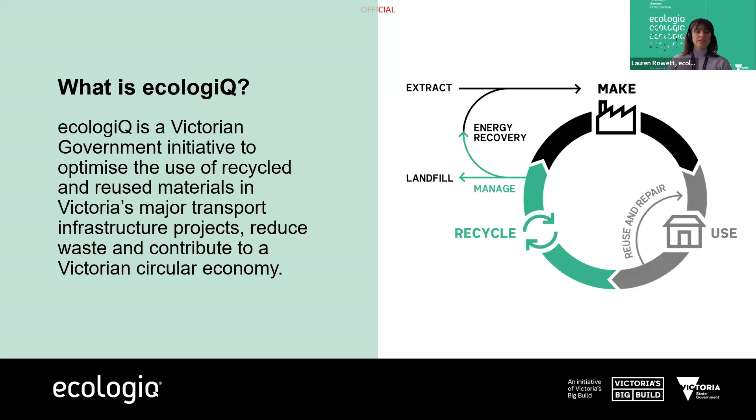The way we do this is through the Recycled First policy. Implemented in March of 2020, the policy requires that all tenderers of Victorian big build projects must consider and demonstrate how they will incorporate recycled and reused materials into that project, and also report on their use before, during and at completion of construction.

This data component is super important. It not only shows us how much recycled material we've been using, but also helps to give us insights into the market and know where our efforts are best placed. Speaking of data, as at the end of July, the policy has seen 4.6 million tonnes of recycled material used in big build projects, which is fantastic, really big numbers there, and 4 million tonnes committed. For those of us online who like to count in MCGs, that's 1.75 MCGs of recycled material.

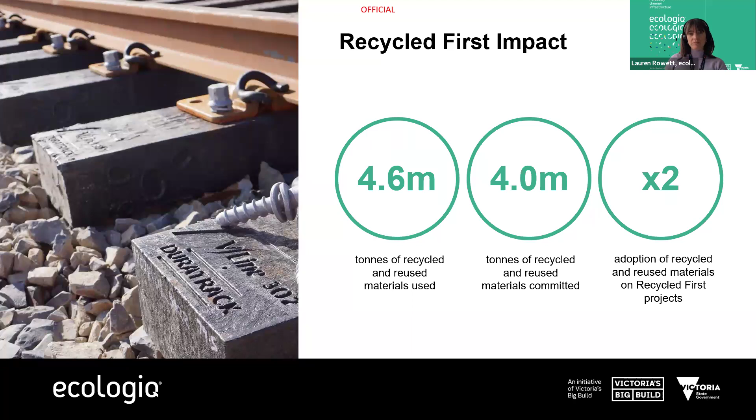Good morning, Lauren. Good morning, everyone. Andrew Papkostas, Principal Engineer, Pavements and Materials within the Department of Transport and Planning. One of my core areas of responsibility relates to the development of specifications and technical standards, and that involves liaising with industry in regards to proposals to introduce new materials into road construction, particularly in my case, the pavement space.

Thanks, Lauren. Thanks, Andrew. Irina? Hi, everyone. My name is Irina Kosteska. My role is Deputy Director Engineering at MRPV. So me and the engineering team are very much involved in supporting ecologiQ and ensuring that the Recycled First policy is implemented on projects. We also work on removing any barriers, which is a result of insufficient or outdated standards, and work very closely with DTP to develop specifications and new standards and approved materials, which support Recycled First.

Beautiful. Thank you, Irina, and lovely to have both you and Andrew back. We have a new panelist joining us today as well, Stephen Howe. Good morning, and thank you for that. Yes, I'm the Director of Engineering Solutions and Innovation at the Level Crossing Removal Project. My role is to work with our alliance partners across the whole program on things like optimising standardised solutions for various design elements of scope, but also in the innovation space, bringing about the use of innovative materials and also sustainable materials, which is why I'm heavily involved in the statewide low carbon concrete working group, which looks at sustainable concrete, but also other sustainable materials and innovative materials to bring into the big build.

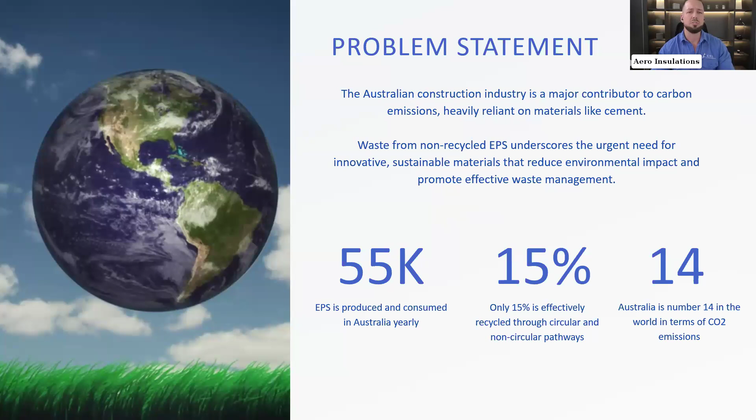These challenges highlight the urgent need for sustainable construction material that reduces environmental impact and makes use of recycled waste. This need is driven by growing regulations and the rising demand for green building practices. Despite all of these pressures, the market often lacks cost-effective, high-performance solutions that align with environmental goals. This gap offers a unique opportunity for innovative products such as Aerofill that can redefine construction standards.

Aerofill complies with the NCC, BCA, and building standards, ensuring it meets the rigorous demands of modern construction projects. Aerofill offers a groundbreaking solution by turning EPS waste into a valuable resource by combining recycled EPS with cement and a bio-based polymer-modified binder. Aerofill not only cuts down on cement use, but also converts EPS waste into an efficient void filler and insulating screed. This process reduces landfill waste and lessens the need for virgin material. The use of a bio-based binder further minimizes the carbon footprint, making Aerofill a standout product in sustainable construction.

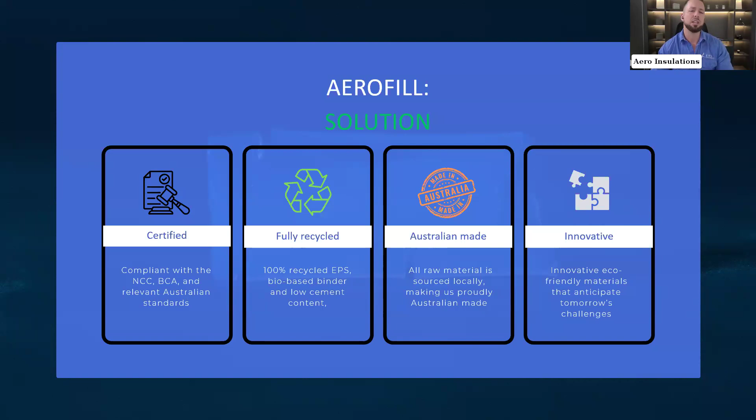Aerofill's unique composition delivers superior insulation and acoustic properties while maintaining structural integrity and reducing the carbon footprint of construction projects. This innovative approach aligns with global sustainability goals and offers a practical, eco-friendly alternative to conventional material.

Aerofill's lightweight nature greatly reduces the structural load on buildings, making it ideal for projects where weight is a critical factor. It offers exceptional thermal as well as acoustic insulation capabilities, ensuring that buildings stay warmer in winter and cooler in summer, leading to substantial energy savings over time.

By integrating recycled EPS and the bio-based binder, Aerofill significantly cuts down on CO2 emissions associated with the production and disposal of building material. The use of Aerofill can lead to lower overall construction costs due to its ease of application and reduced need for additional material. Aerofill not only utilizes waste EPS, which would otherwise end up in landfill, it also encourages the recycling loop within the construction industry, supporting global sustainability initiatives. Aerofill's composition ensures it's durable and requires minimal maintenance over its lifespan, reducing long-term costs for asset owners.

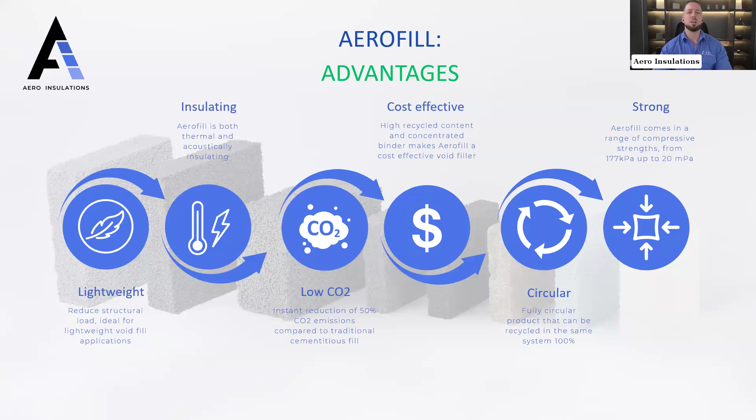Aerofill's versatility is one of its standout features, making it ideal for a wide range of applications across residential, commercial, mining, civil, and specialized sectors. In residential settings, Aerofill excels in slab insulation due to its low thermal conductivity. It's also the preferred choice for renovations and extensions, where cost-effective and energy-efficient properties can enhance the thermal performance of floors, thereby reducing heat loss and energy bills.

In the commercial sector, Aerofill creates inviting and comfortable environments in retail spaces by providing a solid foundation for various floor finishes, while also offering exceptional thermal and acoustic insulation.

Other applications are warehouses, distribution centers, and cold storage facilities, where maintaining consistent temperatures is crucial for storage and logistics. It can be retrofitted onto existing slabs to provide better thermal performance, and is also used in manufacturing facilities to support efficient production processes by providing excellent load-bearing capacity and thermal insulation.

Moreover, Aerofill is an excellent solution for environments requiring significant sound reduction, such as schools and hospitals, helping create quieter, more conducive spaces for learning and healing.

In mining, Aerofill offers a significant advantage over traditional cellular cement fill, with a reduction of 50% in cement and CO2 emissions to reach the same compressive strength results, while maintaining structural integrity, by default offering a lightweight alternative.

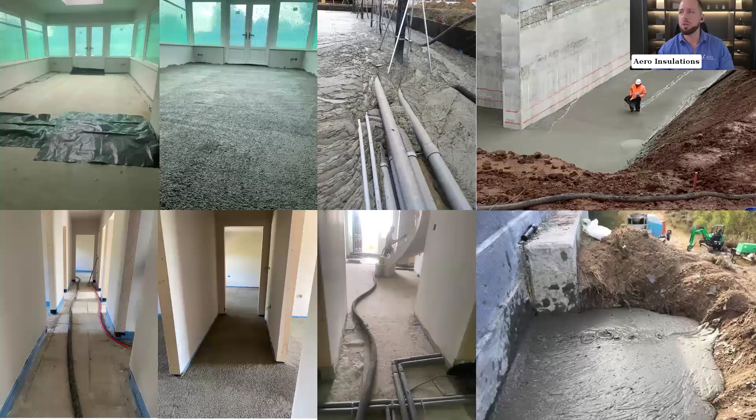On the next slide, we have a few photos showing before and afters of Aerofill being installed as an insulating screed, and a few photos of cellular cement and cellular concrete installations where Aerofill could be an immediate replacement, offering a 50% reduction in cement and using fully 100% recycled aggregate.

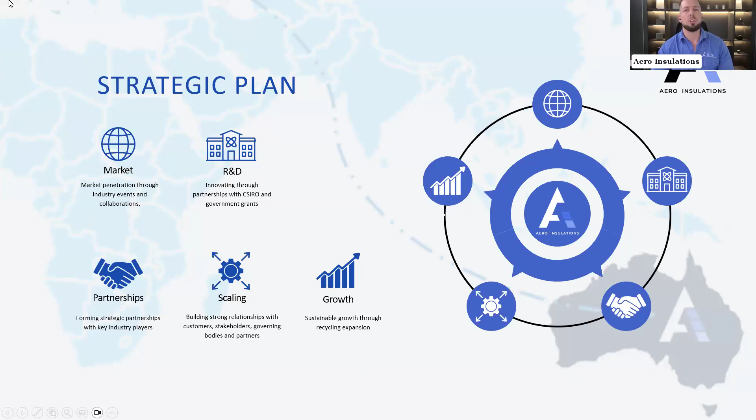So as we've discussed today very briefly, Aerofill is more than just an innovative product. It's a vital step towards a more sustainable future for the Australian construction industry.

By choosing Aerofill, you're not only investing in a high-performance, eco-friendly material, you're also aligning with the growing demand for sustainable practices that meet and exceed industry standards. Aerofill sets new benchmarks in building material by utilizing fully recycled EPS, reducing CO2 emissions, and offering superior performance.

We invite you to join us on this journey towards a more sustainable and efficient construction process. Whether you're planning a residential project, commercial development, or a large-scale industrial endeavor, Aerofill can provide the solution you need. We're ready to partner with you, offering not only innovative material, but also the support and expertise needed to ensure the success of your projects. For more information, or to discuss how Aerofill can be integrated on your upcoming projects, please reach out to myself or my team. Let's collaborate and make your next project more sustainable and cost-effective. I now welcome any questions the panel might have.

Beautiful, thank you so much, Walter. Irina, I can see you switched on first, so take it away.

Thanks a lot, Walter. From what I understand from your presentation, you don't have any barriers to using this material within Australia, is that right? Not really. At the end of the day, all the components that we use in the system are all stuff that's used widely in the building industry. Like EPS is used as waffle pods widely, even geofoam is used very much. All we're doing is using components that are currently being used, combining them together and making something innovative, something we can use in a different way.

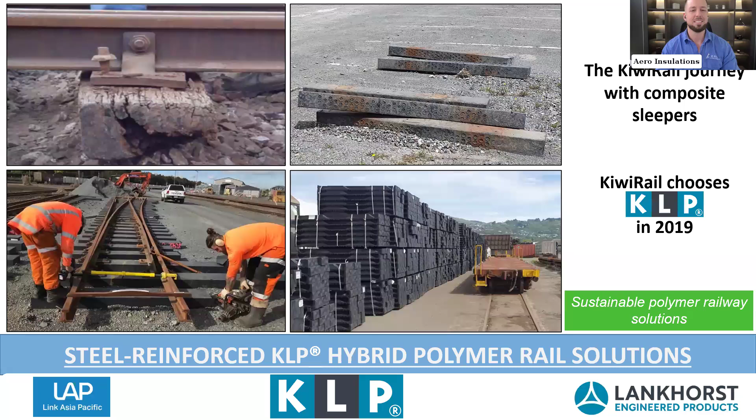Good morning, everyone. My name is Gerhard Klooster from Link Asia Pacific. We are Brisbane based. We are the agents for KLP hybrid polymer sleepers, made in the Netherlands by a company called Lankhorst Engineered Products.

Now, on the first page visible on the screen, you'll see a couple of slides. This basically tells the story, the journey that KiwiRail took. Left top, you see a rotten timber sleeper, basically with a life expectancy normally of 25 years, in this case seeing less than 8 years. So KiwiRail was looking for an alternative option.

They went for a composite product, composite sleeper. Tried that for about 3 years, were not happy with that, and basically went to open tender for other alternative composite sleepers. There were 7 tenderers, and ultimately the contract was awarded to Lankhorst Engineered Products and ourselves. And you see bottom right, a number of mainline sleepers, optimized sleepers that go into a tunnel project, giving you an idea of the scale.

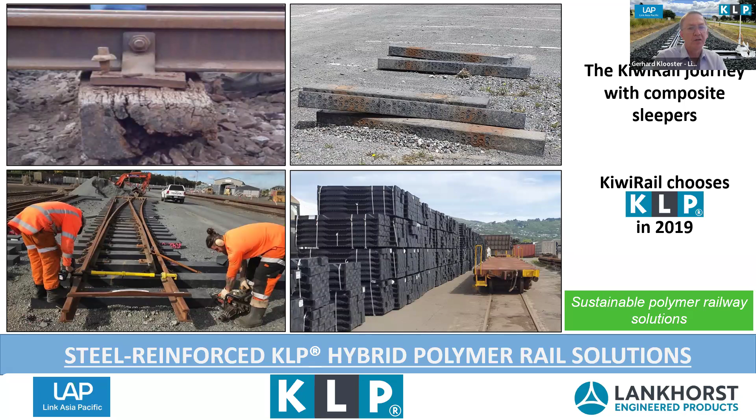Sole supply for 3 years. That was extended by 2 years, and we are now extending it for the 3rd time, showing their happiness with the product.

Left bottom, you see a turnout being assembled and installed in the KiwiRail track. Now, the question is, of course, what makes the difference between our product and others? And that has to do with design on one side, and materials on the other. Next slide, please, Lauren.

So the first product that we use is 100% recycled ductile polymer. The HS is high strength. It means that this product has the strength and stiffness at 60 degrees Celsius that the normal product used in Europe has at 25 degrees Celsius. So it's high strength for the temperatures that we experience in Australia.

The product is 100% recycled material, so it is also 100% recyclable, meaning that at the end of life, you have 2 distinct products, the stiffener and the polymer. They can be separated from one another, basically reused and made into a new sleeper again. So that's a circular economy. On an ongoing basis, every 50 years, you can recycle the product into new product.

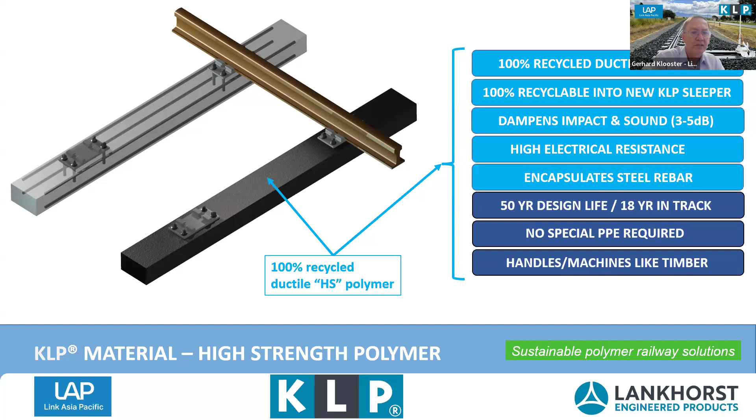Next slide, please. The other material that we have is the steel rebar that you can see across the length of the product, one in each corner, 4 of them in total. It's ribbed, so it has a good physical interaction with the polymer that it is surrounded by and does not move inside the polymer.

It basically, with the steel, gives a high stiffness, and we are aiming to have a stiffness comparable to the timber that we replace, which in essence helps you to intersperse. You can take timber sleepers out and put our product in, because the bending stiffness is very similar to that of the timber it replaces. Steel has a low thermal coefficient of expansion, slightly higher than concrete, slightly higher than timber, but a lot lower than plastic, a lot lower than fibers, and therefore the gauge stability over a wide temperature range is basically guaranteed.

And then because of the steel, if you have a derailment or some sort of extreme overload situation, you will find plastic deformation, but not a brittle fracture.

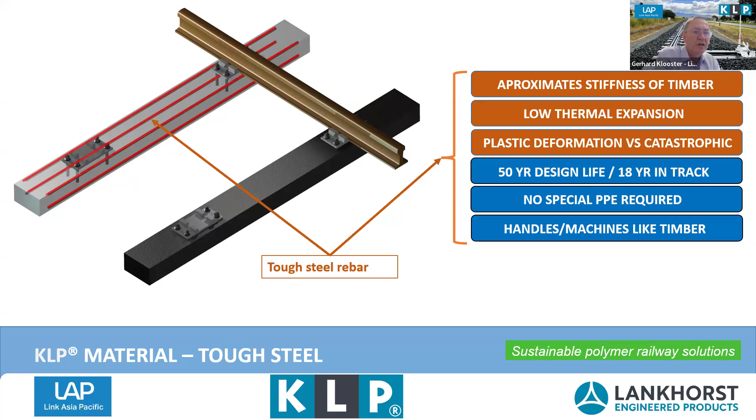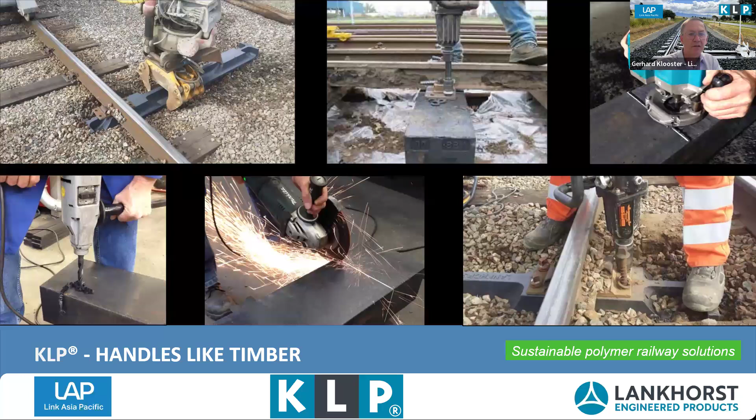We can see how the product is used like any other timber material. The equipment top left handles the same as the standard equipment being used. You can mill it, drill it, cut it, and screw fasteners in with power tools, as you would do with any timber sleeper. So there's no special training required - you can just do it.

Paperwork is always important to have as background. On the paperwork, we have provisional type approvals from MTM Metro in Victoria. We also have provisional type approval from V-Line, and a full type approval from Kiwi Rail, who's been using it since 2019.

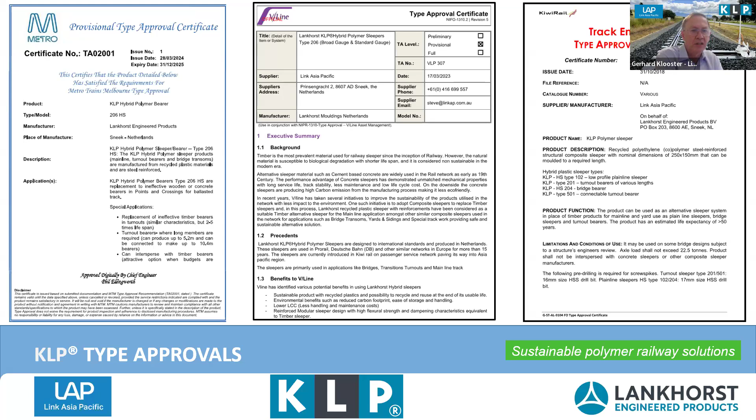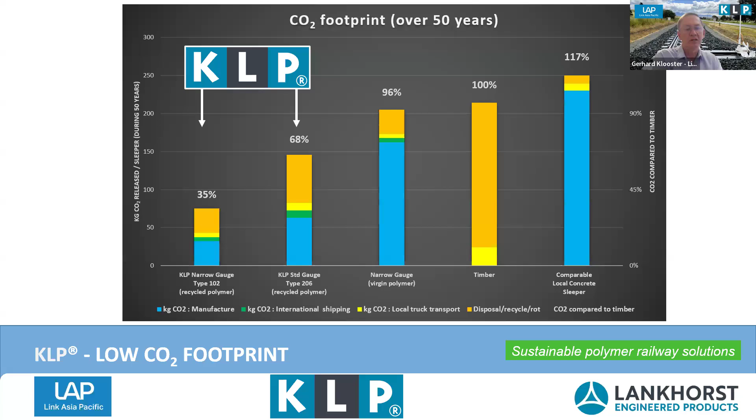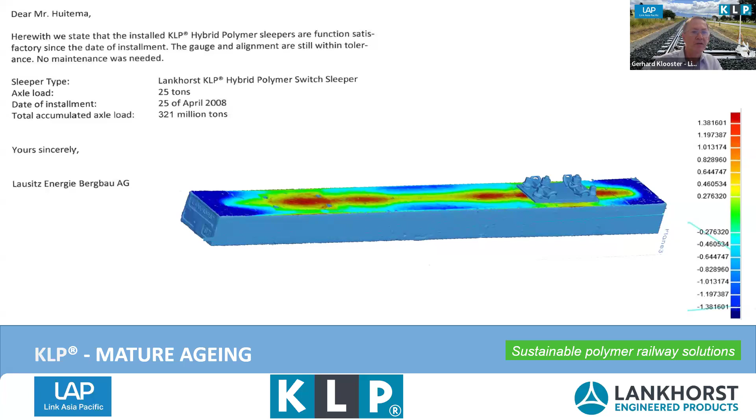This is a little case study - a sleeper that was installed in a coal mine in Germany in 2008. There's a letter with wording at the top that you may read at your own leisure. The axle load is 25 tons in this case. It was installed in 2008 and had seen 320 million tons of traffic. We did a 3D scan of the product showing that it stayed within the original specification of flatness. On the scale on the right-hand side, you can see that it is within plus minus 1.4 millimeters out of plane variation.

You see on the left-hand side the tunnel where KiwiRail was using composite sleepers. This is a special sleeper made as low as possible, 130 millimeters high.

A viaduct in the Netherlands. The benefit with the viaduct is that you can make the entire viaduct lighter because you use lighter dead weight, in that the KLP sleeper is a lot lighter than a concrete sleeper.

And the third set of sleepers is the new Hedgehog, as it's fondly called. It's a new product, it uses less material, it's still recycled, and it gives better lateral stability in track than even concrete, which is 2-3 times the weight. It is shaped in a form where you can get the best benefit out of it.

And finally, you see on the map where our products are installed. And that's the end of my presentation, open for the panel for questions.

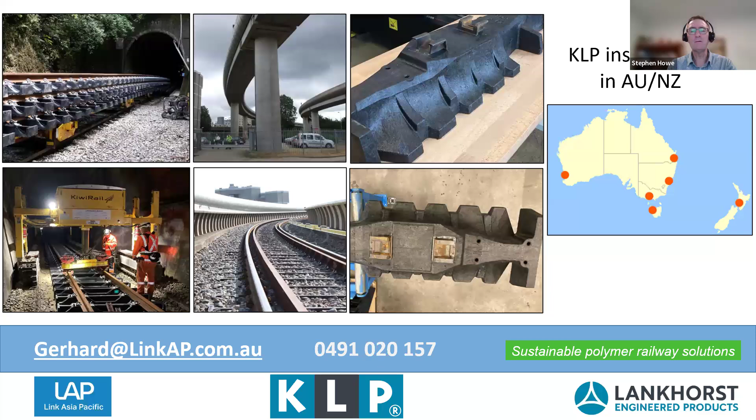I'm interested in that hedgehog one as well. I don't think you showed us that in our offline discussions. How new is that one?

Very new. This is basically undergoing first test. We've got the first sort of off-tool samples. This will be on show at Innotrans in Germany, which is a major rail show in Europe every second year, in September. So this is hot off the press.

The key thing is the benefits are fundamentally that the stability is better than concrete in lateral stability. What you do find is a sagging of ballast and a pumping of ballast, which this one will do a lot less. But it will probably still be another 2-3 years before this one really goes, is ready for production and installation.

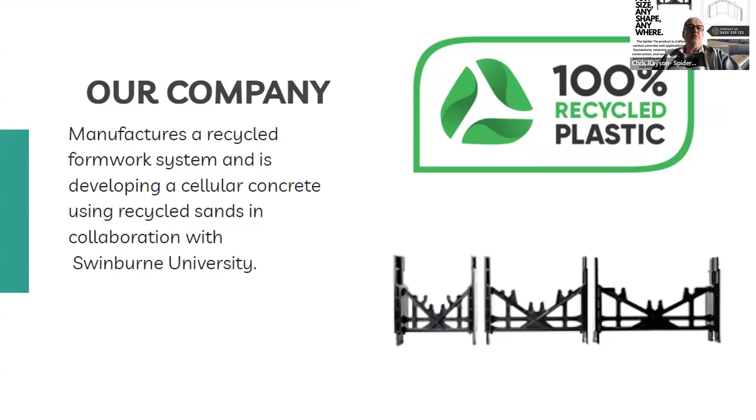Our company manufactures Spider Tie concrete formwork system. It's designed in the USA, but now manufactured in Australia from 100% recycled polypropylene. This system is used for structural and cellular concrete purposes. Got a small video to play showing the encapsulation process - if you could play that, please.

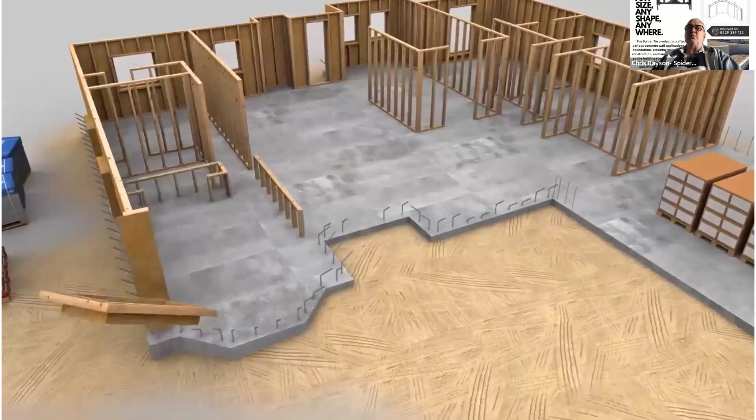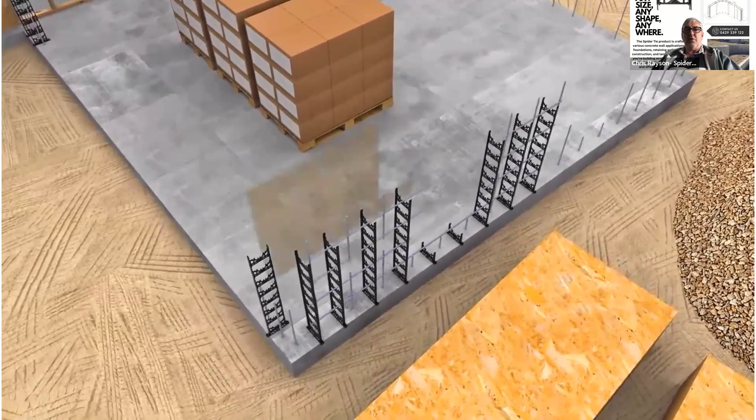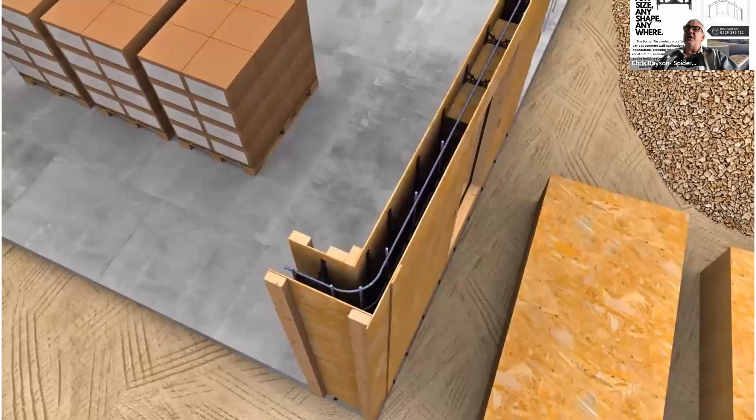So this video is fairly old from the US, just showing how houses were built in its original design using timber, which we're not doing in our construction in Australia. We're actually using light gauge steel frame and developing cellular concrete with help from Swinburne University. But the spider ties themselves, you can see in the video, clip together. They form a wall system that can be filled with either structural or cellular concrete. So the plywood is only a temporary form and can get reused on other jobs.

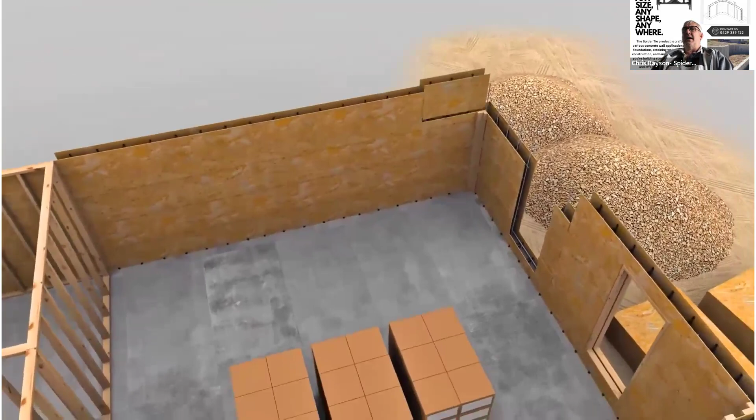Video goes for a couple of minutes, but the plywood can either, as you can see, be put in box sections and assembled, or assembled on site. So currently we're doing a job in South Australia, building a big concrete pit for the grape industry. That's in production over there.

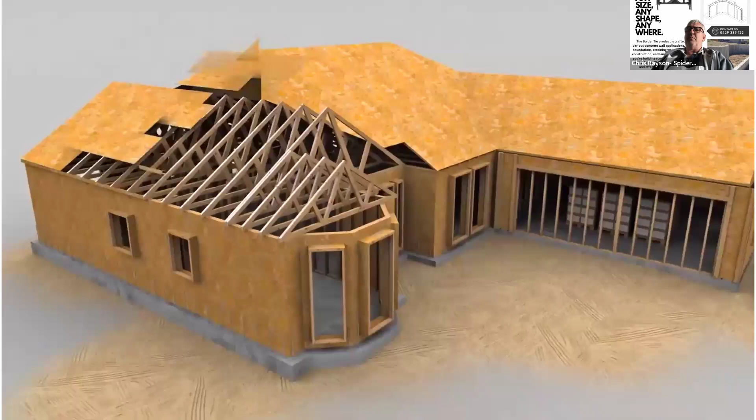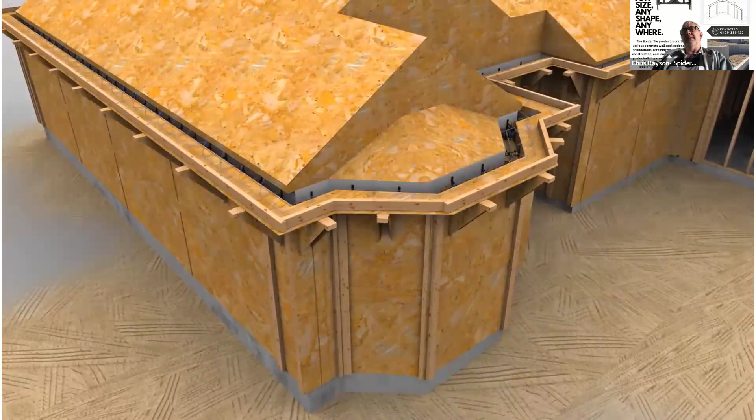But the other thing, we're working with CSIRO to develop monolithic fireproof houses. So you can see in the video here that the Spider Ties are getting attached to the house, and it's ready for - you'll see in a second - a pour that goes and creates the wall system and then continues over the roof to give you monolithic coverage, which then in a fire situation can stop ember attack from entering the building.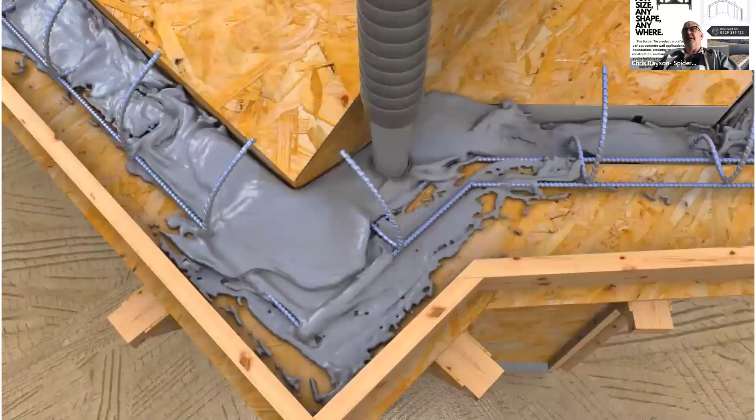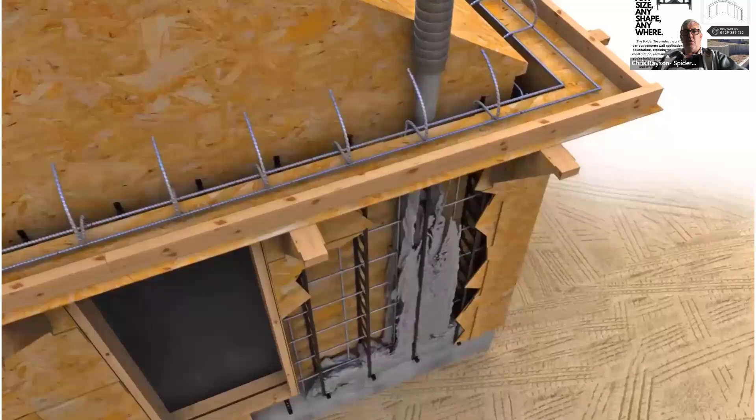With the university, as I said, we're developing cellular concrete, and we are looking at using recycled products like waste from contaminated sites, and there was another product, biochar, made from waste timbers from construction sites. These products can be added into the design mix to develop cellular concrete.

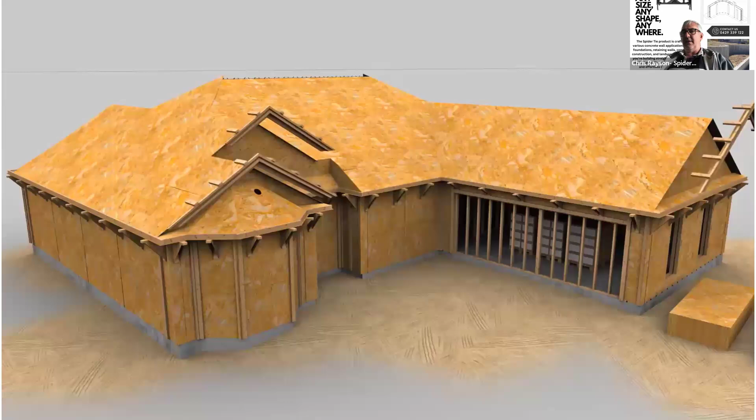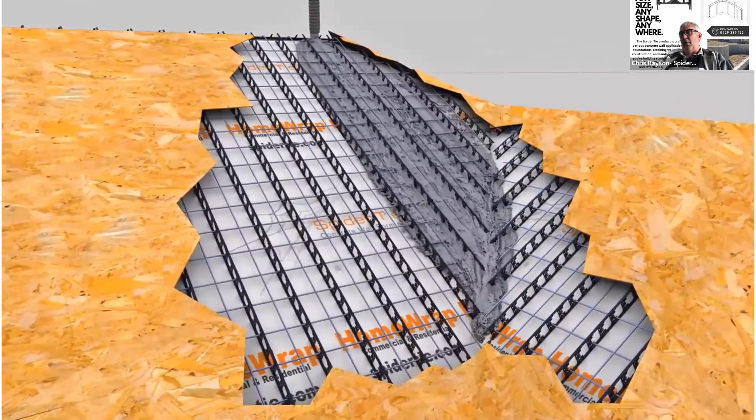The main benefit of cellular concrete is its insulation qualities. When used in this system, it creates a completely encapsulated building. As you can see, the concrete is very lightweight, about 25 kilos at 100 mil per square metre, and this can form a roof system creating an impenetrable barrier for ember attack.

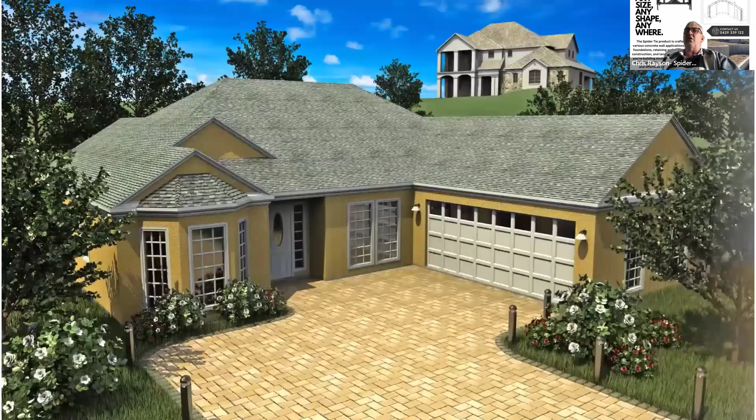I think we might just go to the next slide, but it's showing you a monolithic concrete house here, which is indestructible, really. Some of the uses for spider tie being retaining walls, acoustic fences, pits and pools, commercial and residential construction, and in roadwork construction using the cellular concrete as well.

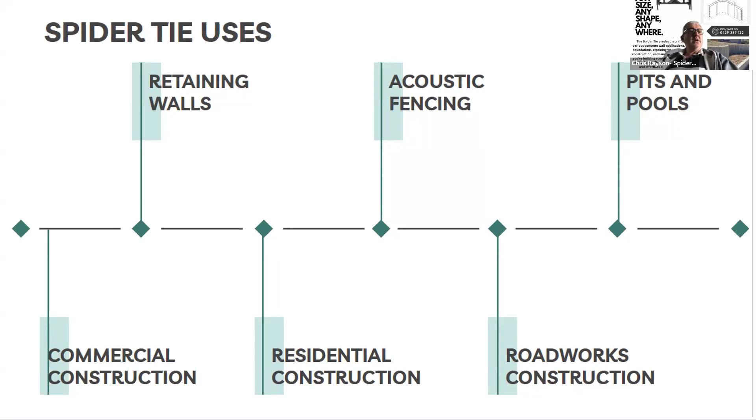Next slide, please, Lauren. The future development, we're working with Swinburne University in a collaboration to develop the cellular concrete products using the recycled products I mentioned before. There's a company in Dandenong producing a sand, which is a recycled product from contaminated waste sites. So the price is quite cheap compared to conventional sands from the quarry, making it more competitive.

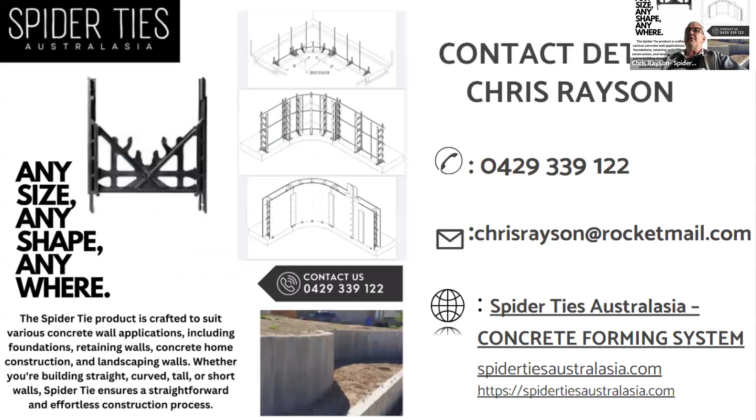Next slide, please. So these are my contact details, just showing how we can be contacted if there's any projects that we could be involved with and trialling with the university.

I've had another meeting with RMIT earlier this week, who are also trialling using products like coffee grounds in concrete, and they've had quite amazing results. There's also another product designed in Australia but tested in the US, carbon nanofibers, and they're getting quite amazing results, and we'll continue doing testing with that product. Quite a short little presentation, but I'm open for questions.

Right, and I suppose if you're looking at sand, there's an opportunity to use recycled crushed glass that's available - that's also been used in civil works as a sand replacement. So all of those types of products, both universities and both professors I'm dealing with at RMIT and Swinburne - we're sort of working together, the three of us.

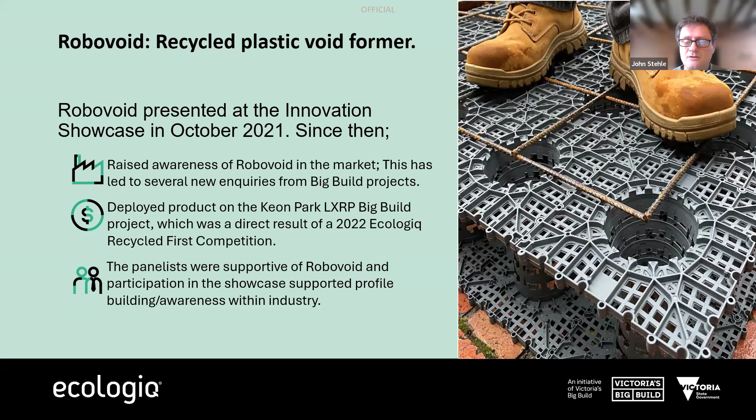In terms of where you'd like to see industry and the future for RoboVoid, what would you like to see in the next 5 years?

Yeah, well, I guess the amount of inquiries that we've received is absolutely amazing, and if we can just see those inquiries bedding in over the next 5 years, I think I'll be sitting on a yacht in the Mediterranean somewhere.

I hope that's you in the next 5 years.

But unfortunately, construction projects are a very slow infrastructure, so we're waiting with our fingers crossed, but also putting a lot of effort into proposals, just improving our offering all the time.

And I think you've mentioned previously that, in terms of general industry changes looking ahead, you mentioned factoring in carbon and carbon reductions. So in terms of sustainability considerations in future, is there something you're hoping we will improve at as an industry? Yeah, so if carbon pricing becomes more integrated into the decision making, that would be very helpful. I think we see that shift happening overseas, particularly in the UK, where they're putting pricing of carbon into the thought process at an early stage.